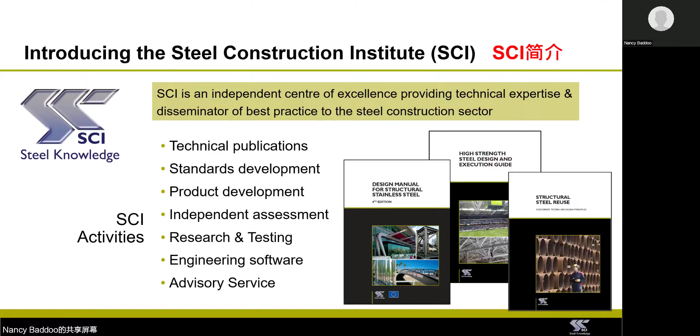At the Steel Construction Institute in the UK, we carry out a range of activities such as writing standards and technical publications. We have been closely involved in writing standards for Europe and the United States on structural stainless steel for many years.

This is our webinar series, 2 talks today and 2 next Tuesday. After each talk, there will be 5 minutes allowed for questions, and if you like, you can put your questions into the chat box.

My presentation today is divided into 5 parts as follows: firstly, an introduction, then I will show you examples around the world of load-bearing stainless steel, and then we get into details, properties, specification, and how to choose the right stainless steel for your project.

So let's start with explaining a few things about stainless steel. What is it? It is the name given to a family of corrosion and heat-resisting alloys of steel, in which you have the element chromium at least 10.5% by composition, and less than 1.2% of the element carbon.

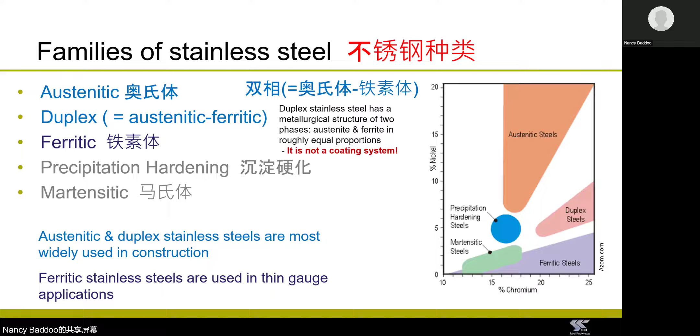The stainless steels used in construction are from the austenitic and duplex family. Within both families, there is a wide range of corrosion resistance, which depends on the alloying content. Most applications by a long way are austenitic stainless steels in construction. However, for weight-sensitive structures such as bridges and offshore platforms, duplex stainless steels will often be a better choice. The higher the alloy content, the more corrosion resistant the alloy, and the higher the cost.

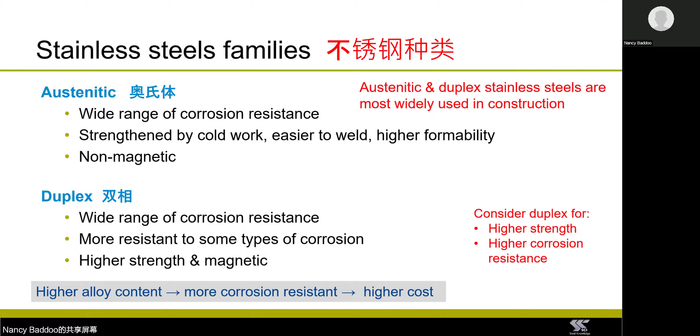Let's turn now to consider when you might use stainless steel in structures. Clearly it's more expensive than carbon steel, so there are only some particular applications where it makes good sense to use stainless steel. Stainless steel can be used in visible applications or in applications which are hidden from the eye. They may be large members or very small components. They can be architectural showstoppers or very basic utilitarian applications.

Firstly, and most commonly, you would use stainless steel if you had a structure needing excellent corrosion resistance and you wanted to avoid the need for a coating. So when might this be? For structures, say, in the food and drink industry or the chemicals industry, there may be a very strong reason why you don't want to risk a painted coating peeling off and contaminating the process taking place within the structure.

Stainless steel makes sense for those types of structures that have very long design lives. I'm talking about structures such as bridges and nuclear structures where the design life might be over 60 years and maintenance is just hugely expensive and something you want to avoid. Then, of course, the higher construction cost is outweighed by the lower maintenance cost.

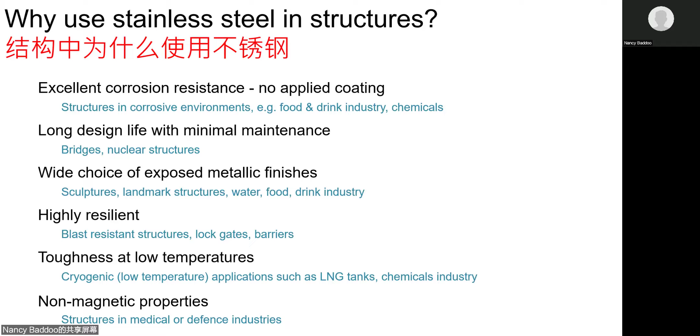Now, let's move on to the second part of the presentation, where I'm just going to take you round the world and show you a few examples of load-bearing applications. So let's start with some buildings and external structures.

So here I'm showing a viewing platform. Quite obvious, isn't it, why stainless was chosen for the viewing platform, because it's right by the sea.

And then if we move down, a local structure are the stainless steel tree-shaped columns in Nanjing. There are 42 of these beautiful structures, 42 stainless steel trees supporting the roof. Now, I think stainless steel was chosen not only because of the appearance, but also the corrosion resistance in a warm and moist environment.

And then the photo I show on the right is in Beijing, and this is a different type of structure altogether. It's a large glass cable net wall, 90 meters high, 60 meters wide, and it's using duplex stainless steel connections for the cable and tension rods, and the tension rods also are duplex stainless steel.

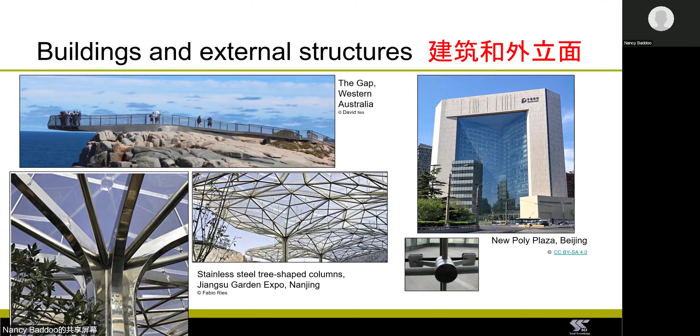Subway entrances has proved to be quite a popular application of structural stainless steel. There are at least 40 canopies now in the US, Washington, DC Metro. Why stainless steel? Well, it looks good, it's corrosion resistant, it's resilient.

These canopies in the Washington, DC Metro, it was a modular design because speed of installation was hugely important. So the modules were bolted together on site, made up of rectangular hollow sections.

And the subway entrance I'm showing on the right is using duplex stainless steel because very high strength was needed for this subway station that was flooded and a huge amount of damage caused during Hurricane Sandy.

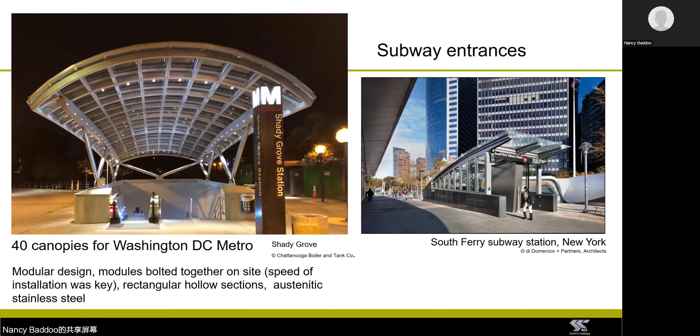Of course, sculpture is a popular application of stainless steel. I love the Cloud Gate structure in Chicago. And would you believe it's made up of 168 stainless steel plates welded together. It's highly polished, you can't see the seams, and it weighs about 100 tons.

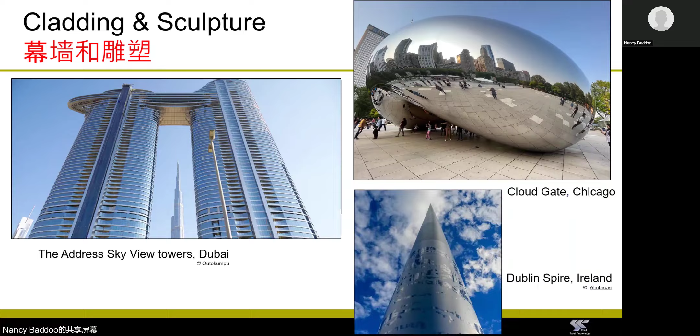Now, moving on from cladding and sculpture, this I feel is the most important area where structural stainless steel is used.

Often these are corrosive environments, and you do not want to have to go back and do maintenance and reapply coatings.

So the drivers for using stainless steel are clear: corrosion resistance, long life, minimal maintenance, no risk of contamination from paint peeling off.

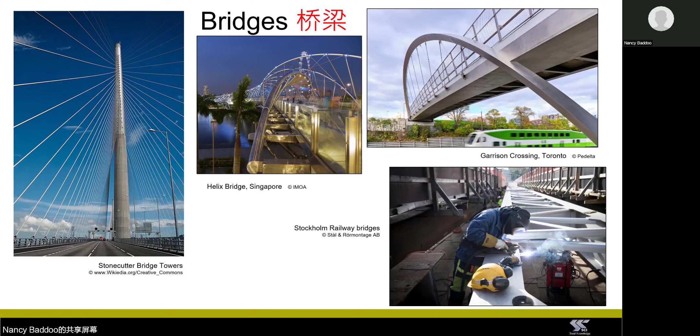We've also got a number of pedestrian bridges made of stainless steel. There are road bridges, and there are bridges carrying railways. So again, the reduction in maintenance, particularly over water or running over a railway, is very beneficial for using stainless steel. Right, let's move on now to the properties of the structural stainless steels we're talking about.

And it can be very useful in design. We'll talk more about that a little later today.

Of course, there can be disadvantages too. Stainless steel, because it strain hardens, can require more power when it comes to forming or cutting.

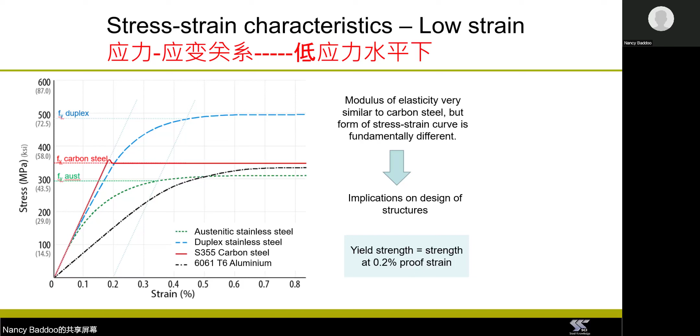Stainless steel has excellent energy absorption properties, much better than carbon steel or aluminium, due to its high rate of strain hardening and excellent ductility. Duplex stainless steel has similar ductility to carbon steel.

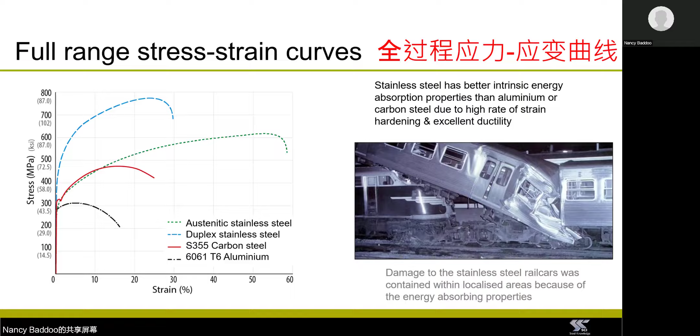So you get a sense for the effect of strain hardening when you look at the ratio of the tensile to yield strength. Note too that the modulus of elasticity that you need in your buckling calcs is very similar to carbon steel. This is the initial modulus of elasticity, and these properties are in the annealed condition.

Now this is a word you may not have come across. It basically means in the softened condition before any strain hardening has taken place.

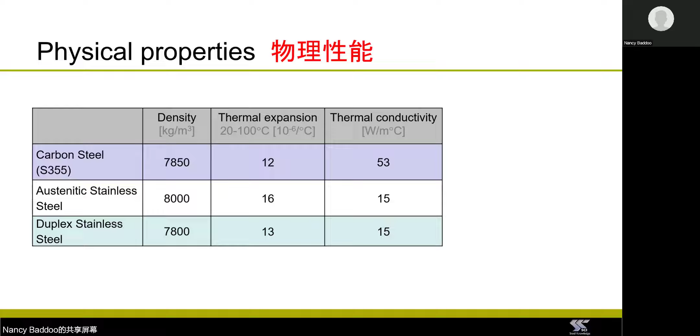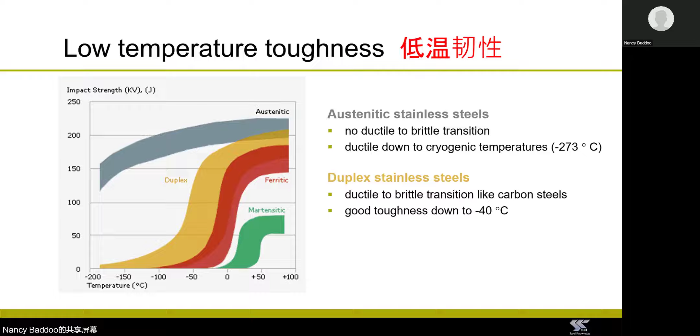So that completes what I was going to talk about properties. We're going to hear much more about designing structural stainless steel after the break. But I'm now going to explain how you specify stainless steel for a project.

When we talk about a stainless steel grade or type, we actually mean an alloy, i.e. a chemical composition, and not a strength. When we talk about carbon steel, we generally are referring to the strength of the carbon steel. But for stainless steel, it is the alloy and composition.

So for the families of stainless steels used in construction, most of the austenitic stainless steels have the same yield strength, around 200 megapascals. I say most because there have been some interesting developments in China, and some high nitrogen and low nickel austenitic stainless steel alloys have been recently developed with higher strengths. So I'm just saying that the most widely available austenitic stainless steels will have a yield strength of around 200 megapascals.

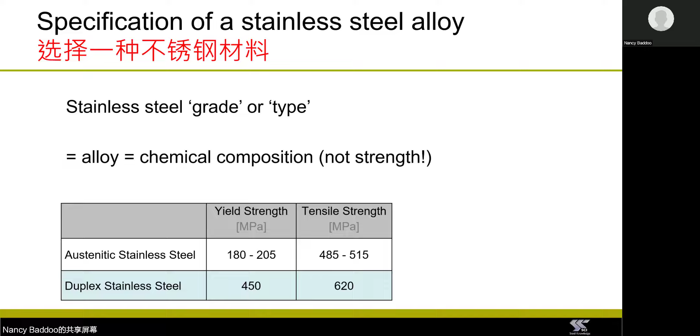I will briefly introduce the Chinese standards that are available for and relevant for load-bearing stainless steel members. Firstly, the standard that gives the alloys and the chemical composition and physical properties, that is GBT 20878. That standard contains lots and lots of stainless steel alloys which are appropriate for use in a wide range of industries.

Then GBT 4237 is the standard that covers the hot rolled stainless steel plate and strip. So these are the thicker product forms, with the thinner products covered in GBT 3280, which covers the cold rolled stainless steel plate and strip. So the cold rolled would be the thinner gauge.

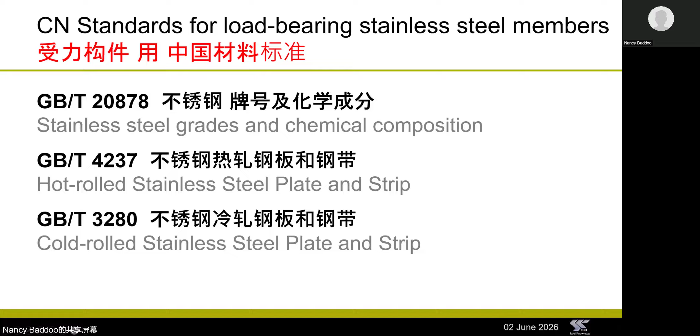This is the time when we're going to open up the Chinese stainless steel structural technical specification, CECS 410, and see what it says about stainless steel alloys. Now, the third talk in our webinar series is devoted to this standard, so I'm just going to say a very little about it.

So first, there are the standard or basic austenitic alloys, 2 of them. Then there are the austenitic alloys that contain molybdenum, so they have better corrosion resistance, and there are 2 of them.

And then there are the standard duplexes. There are 2 there. And there is 1 lean duplex. Now, what do I mean by lean duplex? I mean the alloying composition is less highly alloyed. So it has slightly less corrosion resistance compared to the standard duplex, but still very good corrosion resistance. It means it is a cheaper alloy, but it's not appropriate for use in the most corrosive environments.

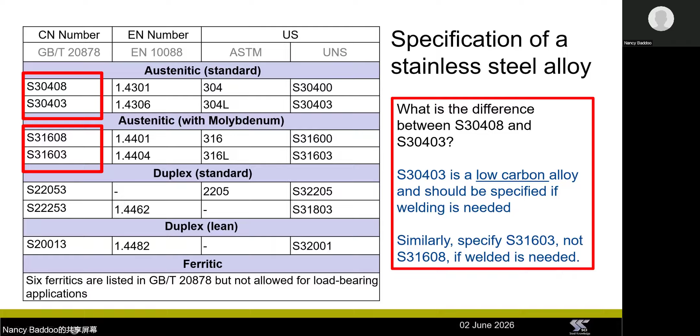Now let's look at the Chinese product standards for hollow stainless steel members. This is a hugely popular product form, widely used in load-bearing applications. I could find 3 Chinese standards. GBT 14975 covers the seamless stainless steel tubes, and then there are 2 for welded stainless steel tubes, GBT...

GBT 12770 is geared more towards mechanical structures, automotive parts, bicycles, furniture, general engineering, whereas JGT 539 is geared more towards construction, so probably that's the standard you would want to specify for architectural, handrails, structural components. This standard places a greater emphasis on the surface finish, corrosion resistance, and structural integrity.

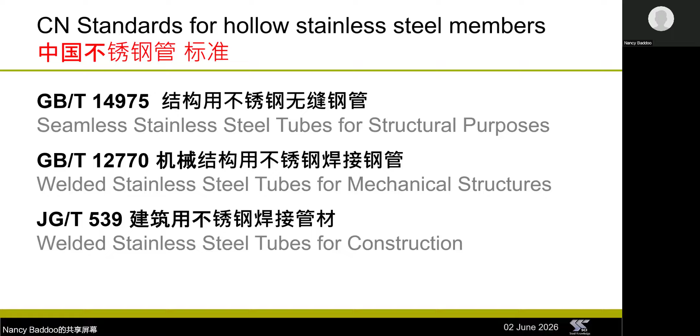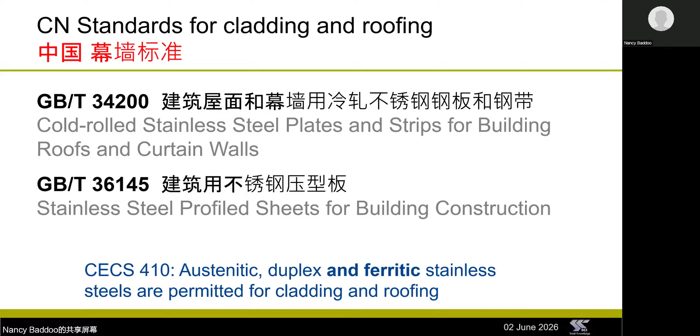Briefly then, what are the standards covering the lighter gauge stainless steels? Well, I've got 2 here I'm showing you. GBT 34200 covers the flat light gauge sheet coil stainless steel products, and then 36145 covers the corrugated and profiled sheets. I wrote at the bottom of the slide that the Chinese technical specification says that austenitic, duplex, and ferritic stainless steels are permitted for cladding and roofing. I've never come across duplex being used for cladding and roofing, but certainly ferritic and austenitic are widely used.

Let's move now to stainless steel fasteners. Here the family of standards are GBT 3098, and part 6 covers bolts, screws and studs, and part 15 covers nuts.

Before I explain how to use the standard, I would just like to emphasize that fastener assemblies should have equivalent corrosion resistance to the most corrosion resistant alloy being used. Very often you see that this guidance has not been followed and you see horrible corrosion. So it's important that you specify the bolt and the nut so that it is at least equivalent to the most corrosion resistant alloy being joined.

So a few slides introducing you to the Chinese standard for stainless steel fasteners. How you name a fastener is first by the letter A for austenitic, D for duplex, followed by a number 1, 2, 3, 4, 5, or 8, and that tells you the corrosion resistance. 1 is the least durable and 4 and 5 are the most durable. You really shouldn't use steel grade A1 - that doesn't have very good corrosion resistance. So the most common bolting alloys you'd be using are grade A2, which is like a 304, and grade A4, which is like a 316 in terms of corrosion resistance.

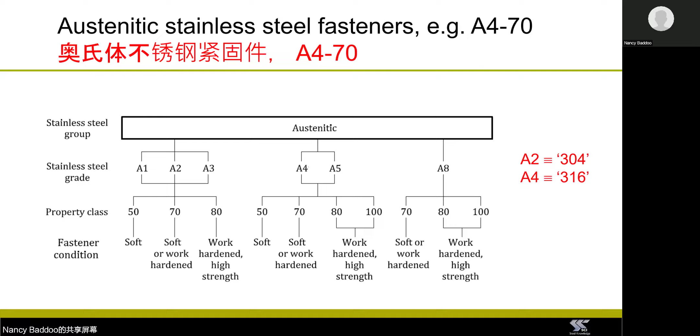And then the final 2 numbers tell you the strength. It's called property class, but you can see here there are property classes 50, 70, 80, and 100. I will tell you a bit more about the strengths in another slide, but I wanted to first of all show you the duplex naming system.

So here we have, starts with a D, and then the 2, 4, 6, or 8 tells you how corrosion resistant it is. So a D6 is your standard duplex. D2 and D4 is the lean duplex. And then we have the strength. Duplex stainless steel fasteners are not as widely available as austenitic fasteners, but if you're joining duplex stainless steel, it really is recommended that you use duplex fasteners.

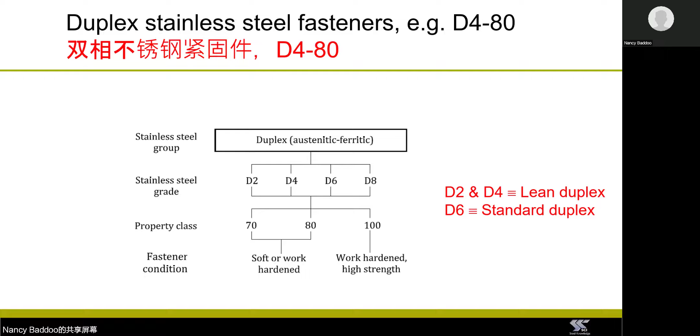So finally, on fasteners, here is a table showing you the tensile strength. Let's look at, for example, A470 - that's a really common stainless steel fastener. You can see that its tensile strength is 700 megapascals. If, however, you needed a higher strength, then you would consider specifying A480, which has a tensile strength of 800.

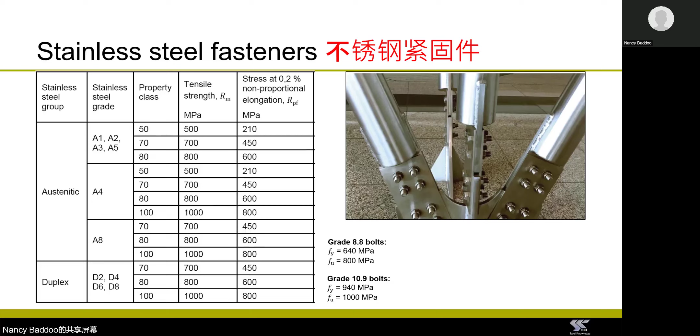What about surface finish? Many surface finishes are available with stainless steel. Firstly, let's talk about mill finishes. These are the finish straight from the production mill, the most common, and the standard finish for heavier sections. It's dull, non-reflective - you might think, is this really stainless steel? But it is. Stainless steel doesn't have to be shiny.

In the European standard EN 10088, the number 1 is used to determine a hot rolled finish, and number 2 for a cold rolled finish. For architectural applications, cold rolled surfaces would generally be chosen - they're smoother and to tighter dimensional tolerances.

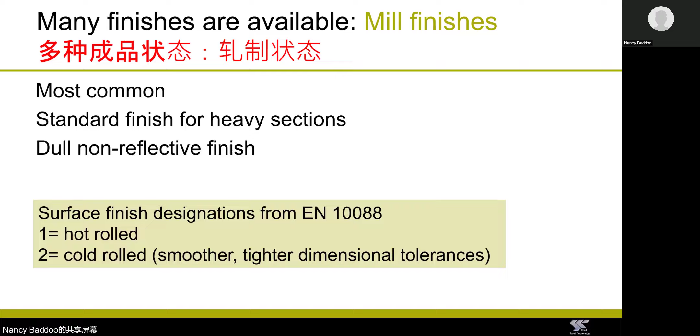But of course, we don't stop at mill finishes. There are many special finishes also available for stainless steel, generally applied at polishing houses further down the supply chain. These may be ground, brushed, polished, even patterned and coloured.

The smoother the finish, the better the corrosion resistance and the better the cleanability. Why? A rough finish is more likely to retain contaminants than a smooth finish, and rain washing is less effective on a rough finish than a smooth one. A rough finish also has more micro crevices than a smooth one. But of course, a smoother finish is a more expensive finish, so you really have to weigh up the advantage of a smooth finish against the additional cost.

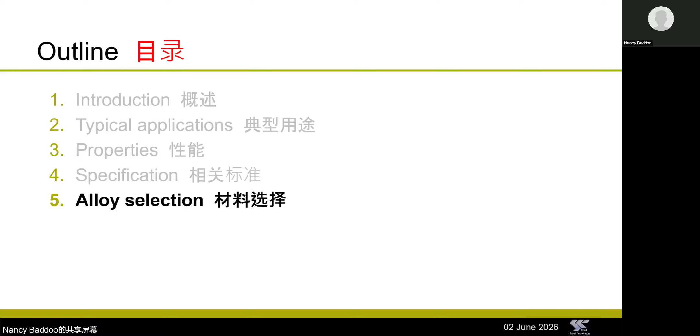Now, the final part of my talk is to lead you through the process of alloy selection. How do I choose the right stainless steel alloy for my project?

The most important part of your choice is the service environment. By that I mean, where is the structure that you're designing? It's important that you characterize the environment carefully. Most of my talk is assuming that the structure is in an atmospheric environment.

So the issues you're concerned with are chloride salts. Is the structure close to the coast, or do you use de-icing salts in cold weather? What type of de-icing salts do you use? Is the structure in a polluted industrial environment? Is there a lot of pollutant in the air due to traffic? Is the structure going to be washed by rain or sheltered?

Washing by rain is good. Stainless steel loves water, so washing by rain is good. Sheltering is not so good, because then you can have an accumulation of chloride salts or other contaminants.

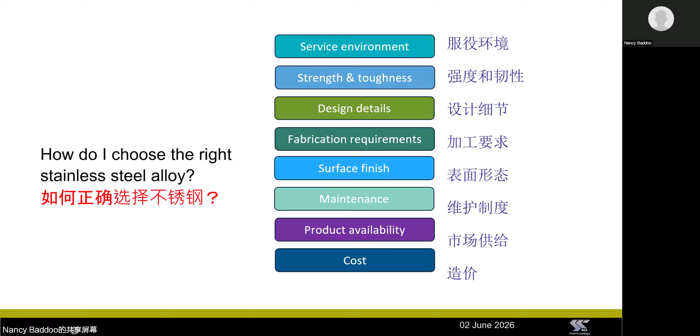What do you need? Rod, fasteners, hollow sections, plate, cold form channels, angles - they're likely to be available in austenitic stainless steels.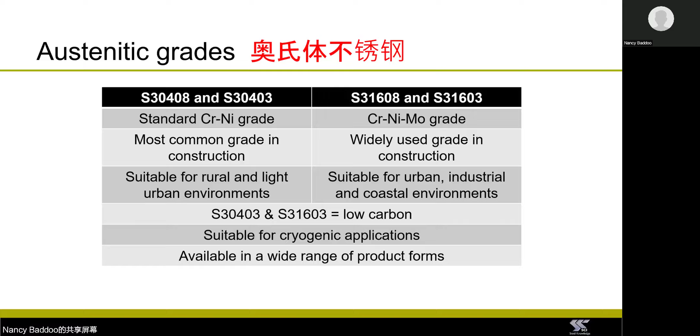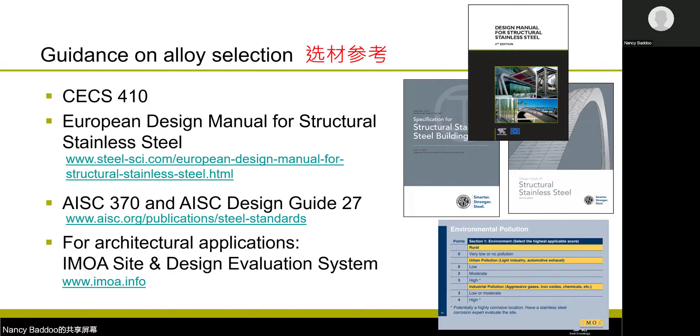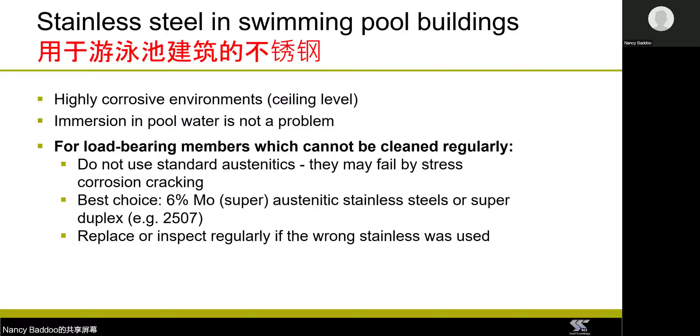The general advice is that if you have a load-bearing member in an environment like this that cannot be cleaned very regularly, then you should not use the standard austenitics. You need to use a more highly alloyed stainless steel, perhaps a 6% molybdenum super austenitic or a super duplex, and very regular inspection should be carried out if the wrong stainless steel has been used.

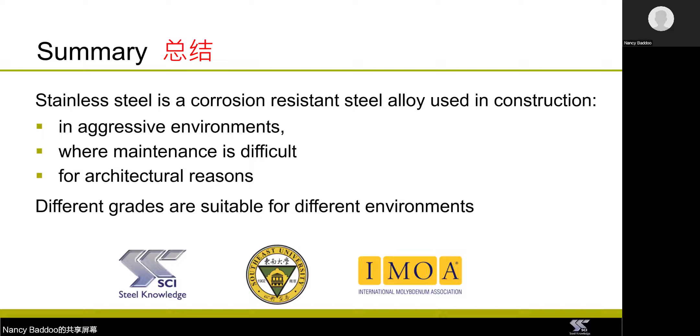This completes what I'm going to talk about this morning. I've summarized different grades for different environments. If anything I've said has been interesting and helpful to you and you would like to go back and check it out, a recording of all the talks and the slides as PDF will be hosted on this WeChat channel and the IMOA Chinese website after the webinars.

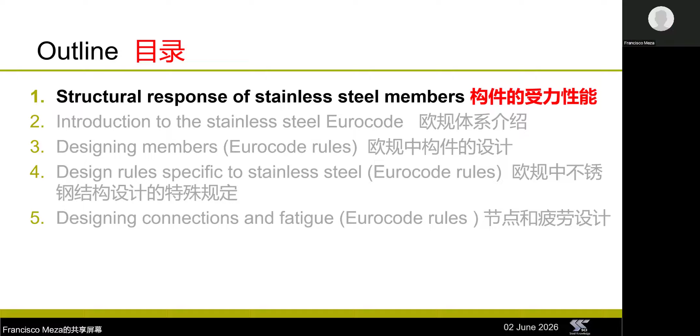Now, by nonlinearity, what I mean is that the stress strain behavior deviates from the linear behavior that is characteristic for carbon steel. So that is before the yield strength is reached.

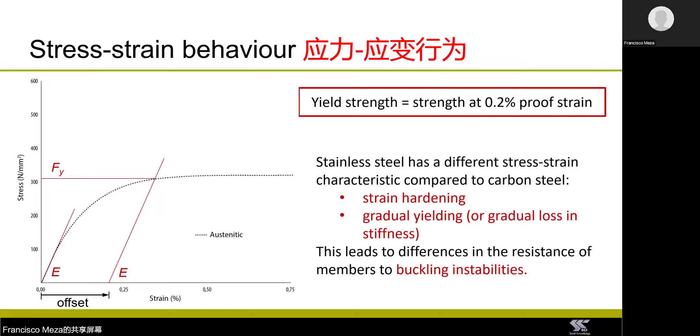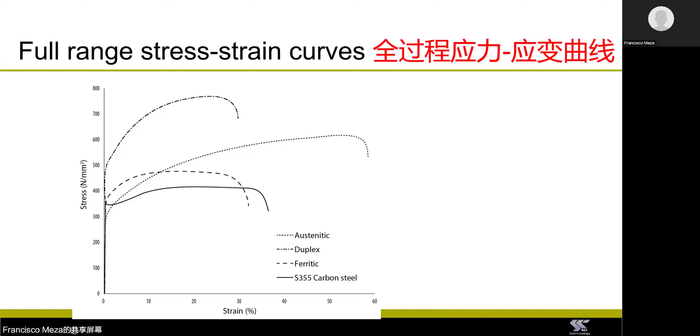So how does the nonlinearity of stainless steel affect its buckling performance? If you look at any of the elastic buckling resistance formulas, you will see they all have one thing in common, which is that they are all proportional to the elastic modulus of the material. This is the case for local buckling, column buckling modes such as flexural buckling, or lateral torsional buckling in the case of beams. Now, the initial modulus of stainless steel is similar to that of carbon steel, but as you can see in this figure, it decreases gradually as you approach the yield stress.

Because of the reduction in the elastic modulus when the stress increases, the elastic buckling resistance also reduces, which leads to a reduction in the resistance of the member. Now, you have to bear in mind that for carbon steel members, this reduction in the elastic buckling resistance does not occur until the yield strength is reached. Therefore, you could expect that the buckling performance of stainless steel is going to be slightly worse than that of carbon steel.

Now, in most stainless steel design codes, the buckling resistance is calculated using the initial elastic modulus, and the reduction in the elastic modulus is accounted for by using different buckling coefficients in the resistance equations from those used for carbon steel.

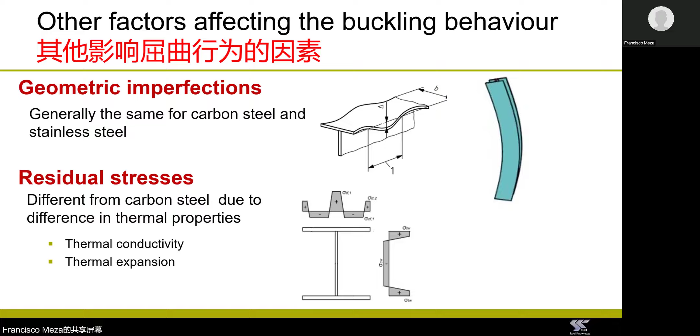Now, the residual stresses of stainless steel and carbon steel sections are generally different because of the different thermal properties of carbon steel and stainless steel, as Nancy showed you previously. The main thermal properties affecting the residual stresses are the thermal conductivity and the thermal expansion. The thermal conductivity of stainless steel tends to be lower than for carbon steel, and the thermal expansion tends to be larger. And for austenitic stainless steel, the thermal conductivity is the lowest, and the thermal expansion is the largest. They also show the most pronounced loss of stiffness, and because of that, they tend to exhibit the lowest buckling performance of all the stainless steel alloy families.

Now, not all buckling modes are affected to the same degree by the nonlinearity of the stress strain characteristic or the geometric imperfections and residual stresses. For example, global buckling is known to be more affected by these factors than local buckling.

Here I'm showing you what happened to a stainless steel column depending on how slender it is. So for columns with low slenderness, that means relatively short columns, the resistance of the column is governed by yielding, and therefore the beneficial effect of strain hardening will result in a stainless steel column reaching a larger resistance than a carbon steel column. Now, in a long column or a column with a high slenderness, the resistance is governed by global buckling.

In this case, the compressive stresses in the column will be below the limit of proportionality of stainless steel, and therefore the behavior will be predominantly elastic, and in this case, the stainless steel column will behave in a very similar way as a carbon steel column. So we're referring to this range of the stress strain curve.

Now, for columns of intermediate slenderness, the resistance is also governed by global buckling, but in this case, the compressive stresses in the column will be between the limit of proportionality and the yield strength. As you can see in this figure, this is the region where the detrimental effect of the nonlinearity is more pronounced. And therefore, in this range of slenderness, a stainless steel column can be expected to be less strong than a carbon steel column.

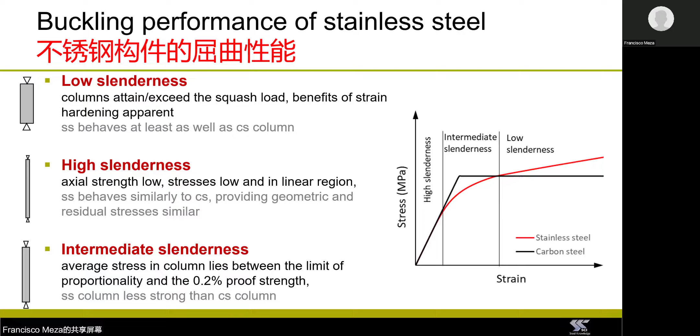Okay, so that was a brief introduction about how the stress strain characteristic of stainless steel affects its buckling performance. Now I'm going to give you a brief introduction about the Eurocodes.

So when designing stainless steel structures in accordance with the Eurocodes, there are three main parts that need to be used. We have Eurocode 0 that lays out the basic principles of design in the Eurocodes and tells you how to choose the load combination depending on the type of design you're doing. Then we have Eurocode 1, which gives the rules for calculating the design actions on the structure, and Eurocode 3, which gives the rules for calculating the resistance of the structure.

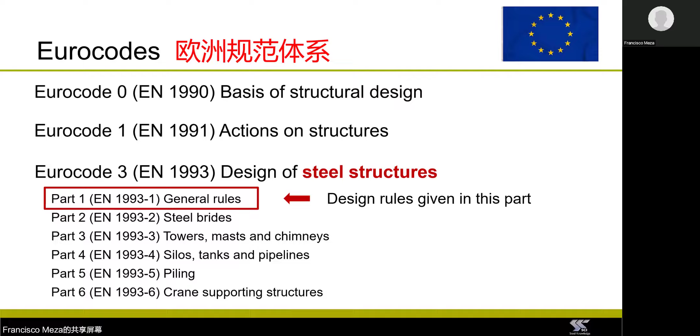So Eurocode 3 contains 6 main parts, and part 1 contains the general rules for the design of steel structures. This is the part that you will need to use for most cases. Then you have parts 2 to 6, which provide rules that are only applicable to specific types of structures.

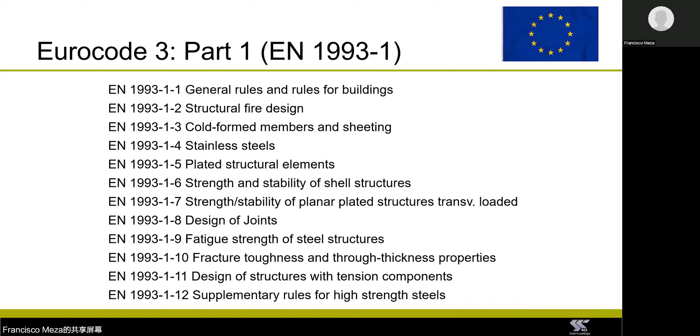Now, if you look into Eurocode 3 part 1, you will see that there are, at the moment, 12 different parts, although there are new parts that will be added in the future. So the rules for stainless steel structures are given in part 1.4, and this is a supplementary part that modifies the rules that are given in other parts of Eurocode 3 part 1, which are the ones you can see here.

So Eurocode 3 part 1.4 covers the design of structures made of the three main alloy families: that is ferritic, austenitic, and duplex stainless steel. And the type of section can be hot rolled, welded sections, cold formed sections, and also bar sections. As I mentioned previously, Eurocode 3 part 1.4 is a supplementary standard, which means that it only gives rules when the rules for carbon steel that are given in other Eurocode parts need to be modified in order to make them applicable to stainless steel.

The standard covers the design of members and connections at ambient temperature and also under static loading. And for other design scenarios, such as fire design, design against fatigue, or other types of structures such as shell structures, the rules are given in other Eurocode parts together with the rules for carbon steel.

Eurocode 3 Part 1.4 was first published in 2006, and since then it has been amended twice. The first amendment was in 2015, and the second one was in 2020.

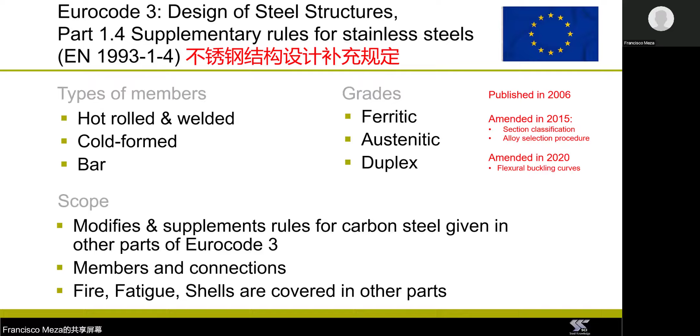Now, the modifications made during these amendments have been very localized, but currently all the Eurocodes are experiencing a major revision with the development of the second generation of the Eurocodes. So the intention of these revisions is to improve the ease of use, increase harmonization

between the Eurocode parts, and to improve the design rules. And for Eurocode 3 Part 1.4, the second generation will provide more accurate and comprehensive rules for the design of stainless steel structures.

So many of the parts for the second generation of Eurocodes have already been published to help engineers prepare and get familiar with the new Eurocodes. But until March 2028, you should still be using the first generation of the Eurocodes.

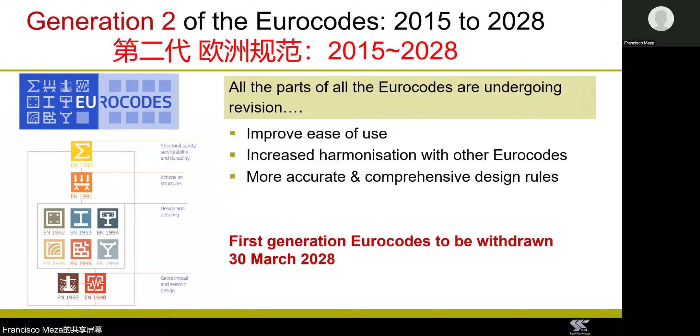Okay, so now I will talk about the design of stainless steel members in accordance with Eurocode 3 Part 1.4.

So the design rules given in Eurocode 3 Part 1.4 follow the same approach as the one for carbon steel. For tension members and restrained beams, the rules are identical to those for carbon steel. In these cases, the resistance is not controlled by buckling, and therefore using the same rules given for carbon steel is conservative. Now, for the case in which the resistance is controlled by buckling, Eurocode 3 Part 1.4

applies some modifications to the carbon steel resistance equations, but tries to keep the same format of the equations that are used for carbon steel. So the idea is that anyone familiar with the design of carbon steel members will have no issue designing stainless steel members.

Eurocode 3 Part 1.4 also includes rules on alloy selection, which Nancy briefly mentioned, and these rules are specific to stainless steel. It also provides modifications for the calculation of deflection to account for the gradual loss of stiffness of stainless steel. And Eurocode 3 Part 1.4 also includes specific rules for stainless steel that permit taking advantage of the benefit of strain hardening. I will describe these rules later on in this presentation.

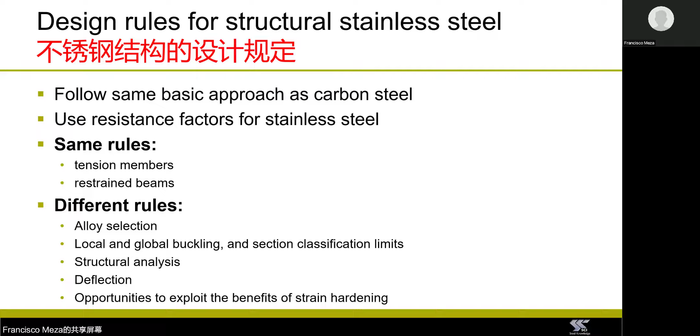Okay, so let's talk about the design for local buckling and the section classification limits. So the purpose of this classification is to assess the susceptibility of the cross-section to local buckling. Now, the risk of local buckling only exists when the member is subject to compressive stresses, which is why if the cross-section is subject to tension, you don't need to check its cross-section classification.

of the cross-section. And when you check the class of the cross-sectional element, you are basically comparing its width to thickness ratio against limiting values. And these limiting values depend on the yield strength of the steel, the stress distribution across the element, and whether the element is an internal or an outstand element.

So an internal element would be the web of an I section, for example, which is supported on both sides by the flanges. And an outstand element would be the flanges, which are only supported on one side by the web.

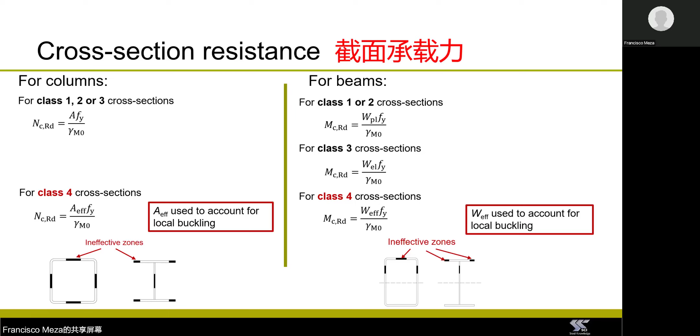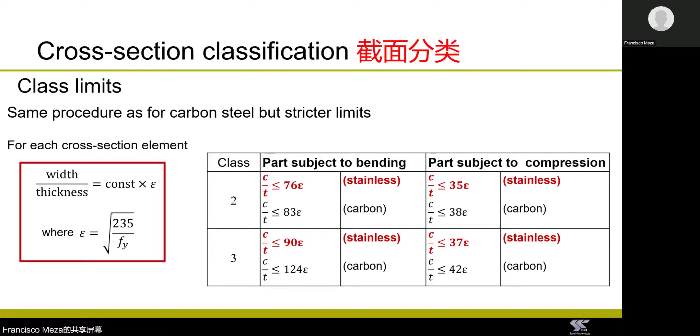So here I'm showing you some of the classification limits that are given in the Eurocodes for carbon steel and for stainless steel. Cross sections that are not able to satisfy the class 3 limits are classified as class 4, which means they are susceptible to local buckling. Now, if you compare the class limits for carbon steel and stainless steel, you can see that the limits for stainless steel are more strict than those for carbon steel, and this is because of the more pronounced non-linearity of stainless steel.

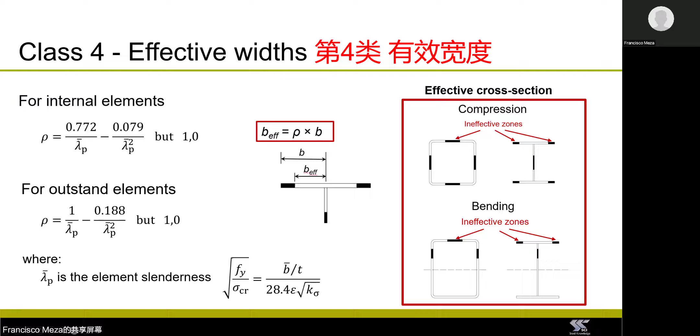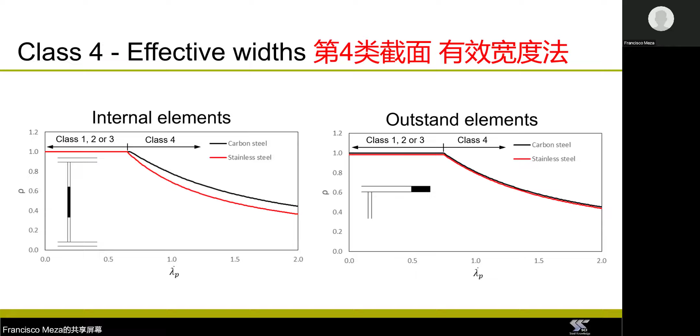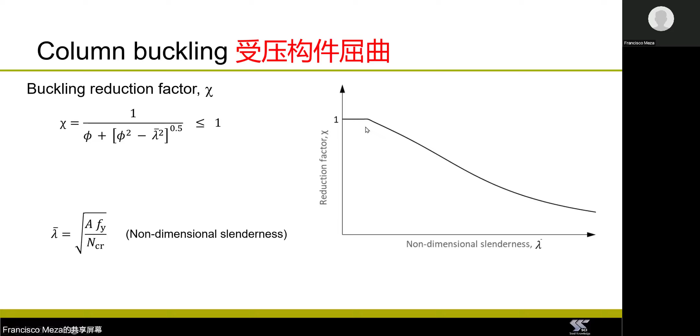The reduction in resistance due to global buckling is taken into account by the reduction factor chi. In this slide, you can see the equations that are used to calculate this reduction factor. As you can see, the reduction factor chi depends on the non-dimensional slenderness of the column, given by the symbol lambda bar zero, lambda bar. The curve that expresses the reduction factor chi as a function of the non-dimensional slenderness of the column is known as the buckling curve, which is this curve you see here.

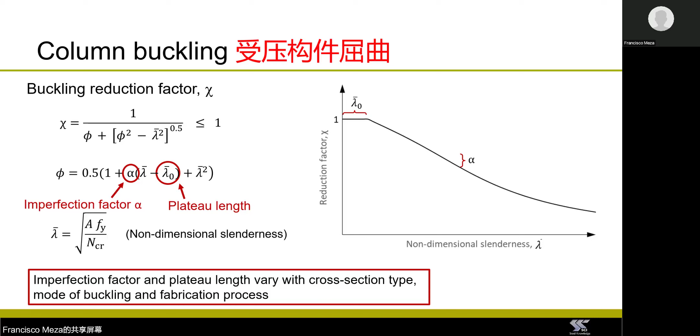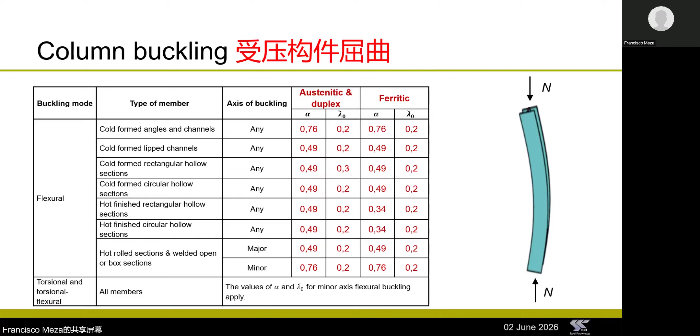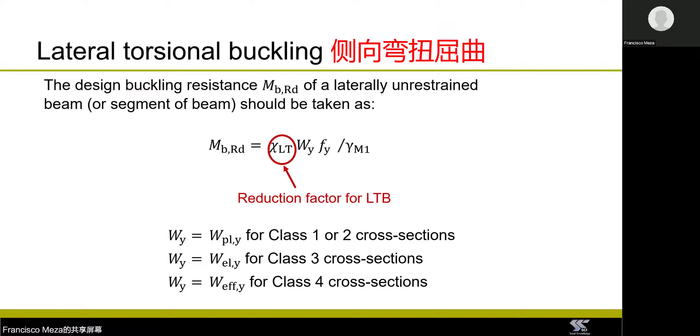Okay, let's talk about lateral torsional buckling of beams now. The design of beams against lateral torsional buckling is very similar to the design of columns, which I have just shown you. Here we have the equation used to calculate the resistance of stainless steel beams against lateral torsional buckling, and this equation is the same equation used for carbon steel beams. In a similar way as for columns, the reduction in the cross-sectional resistance due to lateral torsional buckling is accounted for through the reduction factor chi sub LT.

Here you have the equations used to calculate the reduction factor chi sub LT. The only difference between these equations and the ones used for carbon steel beams is the values used for the imperfection factor and the plateau length factor. For stainless steel beams, the plateau length is taken as 0.4 for all types of cross sections, and the imperfection factor is taken as 0.34 for cold formed sections and hollow sections, and 0.76 for welded open sections and any other type of section.

You might have noticed that the equations for calculating the reduction factor chi sub LT are the same as the ones used for columns. But in this case, you have to use the non-dimensional slenderness of the beam, calculated based on the elastic lateral torsional buckling moment. In the second generation of Eurocode 3 part 1.4, there will be some minor changes to this lateral torsional buckling curve, and there will also be a new equation for determining the reduction factor for lateral torsional buckling.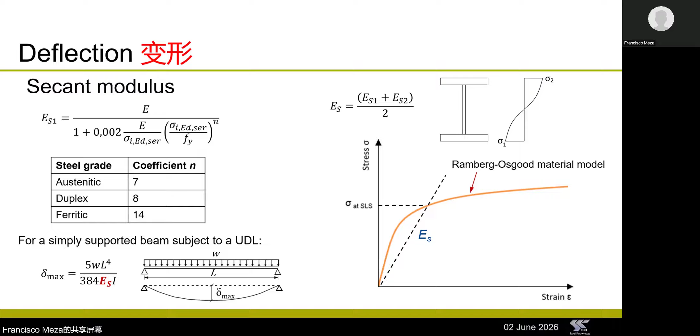Now I'm going to tell you about design rules that are going to be included in the second generation of Eurocode 3.1.4, which have been derived specifically for stainless steel, and are intended primarily to take advantage of the beneficial effect of strain hardening. I'll cover the calculation of an average yield strength, used to account for the increase in strength that cold formed stainless steel sections experience during fabrication, and also an alternative design method for calculating the resistance of stainless steel sections, called the continuous strength method.

I'm going to start with the rules for calculating an increased yield strength that results during the fabrication of a cold formed stainless steel section. This increase in strength is because of the significant strain hardening of stainless steel. So when you plastically bend a sheet or plate made of stainless steel, the material will show an increase in its yield strength due to the cold work that you apply.

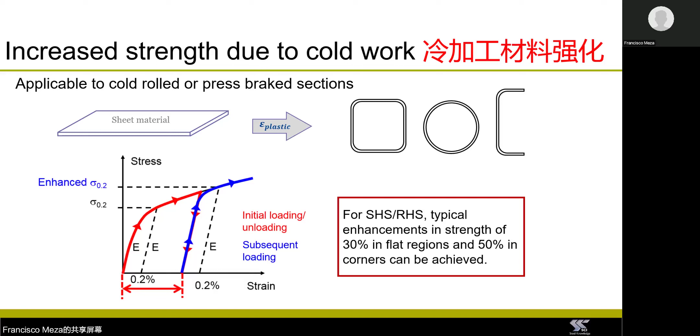In this slide, I'm showing you how this increase in yield strength is distributed over a square hollow section and a circular hollow section.

For the square hollow section, the darker red around the corners represents a larger increase in yield strength, which results from the significant plastic deformation applied to form the corners. For square and rectangular hollow sections, the flat portions might also show an increase in yield strength depending on the fabrication process, but this increase will be less significant than in the corner regions.

In a cold-formed round hollow section, you will also get an increase in yield strength, but this increase is uniformly distributed across the entire cross-section because the plastic deformations in circular hollow sections are more uniform.

So Eurocode 3.14 allows you to calculate an average yield strength for the entire cross-section based on the yield strength developed in the corner regions and also in the flat regions.

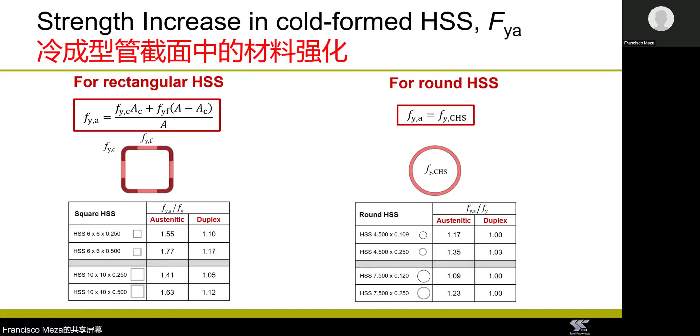One important thing to take into account is that you cannot use the average yield strength when designing a cross-section that contains a weld or is adjacent to a weld. This is because of the annealing effect of the weld, which can completely remove the increase in strength due to cold work. So if the cross-section is near a weld, you will have to use the nominal yield strength when designing the cross-section.

The type of welds I am referring to are welds carried out after the fabrication of the section. This would include, for example, the weld used when attaching an end plate to the column, but it doesn't include the seam weld used during fabrication of the section, because the presence of this seam weld is already taken into account by the equations used to calculate the average yield strength.

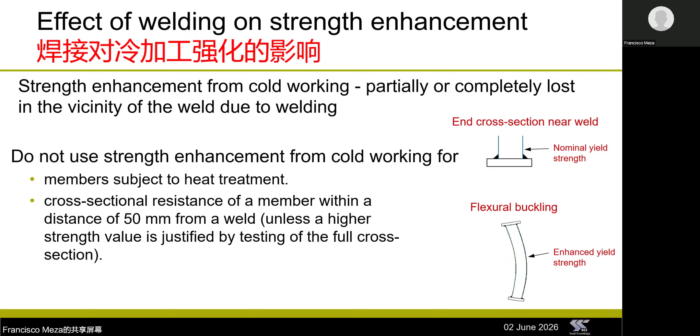Eurocode 3.14 will also include the continuous strength method, which is a design method for calculating the resistance of stainless steel sections that takes into account the beneficial effect of strain hardening.

One characteristic of the continuous strength method is that it does not require classification of the cross-section into class 1, 2, 3, or 4, and treats all cross-sections in the same way.

One thing that is very important to take into account is that in order to use the continuous strength method, the section cannot be susceptible to global buckling. So you will need to make sure that you provide sufficient restraint to your columns or beams to prevent flexural buckling or lateral torsional buckling from happening.

So the way the continuous strength method works is: first, you have to calculate the slenderness of the cross-section, which is given by the square root of the ratio between the yield strength and the elastic critical local buckling stress of the cross-section. Then you can use what we call the CSM base curves, which give you the maximum compressive strain the cross-section can sustain before failing due to local buckling.

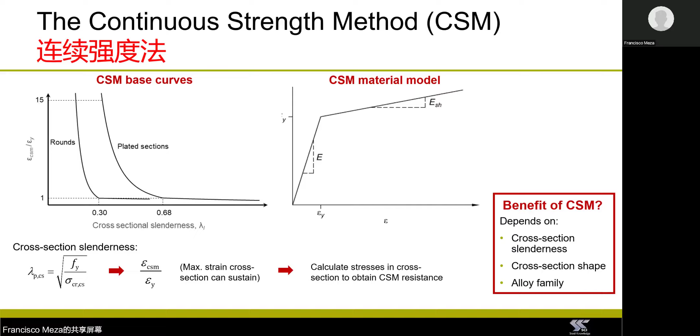Okay, so now we're going to move to the last part of this webinar, where I'm going to briefly mention the main points that you need to bear in mind when dealing with stainless steel bolted and welded connections. And then I will say a few words about fatigue.

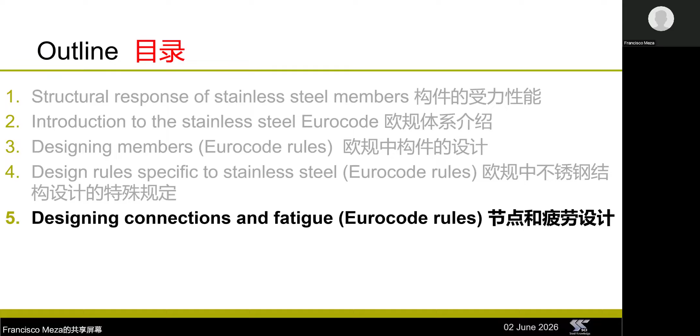One of the main things that need to be taken into account when designing stainless steel bolted connections is that the bolt, the nut, and the washer should have better corrosion resistance than the connected plates. This means you should use stainless steel bolts when connecting stainless steel members, and you should not use galvanized bolts, even in temporary structures, because of the risk of bimetallic corrosion.

Many of the design rules used for carbon steel bolted connections are also applicable to stainless steel bolted connections. For example, the minimum and maximum spacing requirements for stainless steel bolts are the same as those for carbon steel bolts, so there's no difference there. And the equations given in Eurocode 3 part 1.4 for calculating the tensile and shear resistance of stainless steel bolts are also very similar to the equations used for carbon steel bolts. If anything, they predict higher resistances.

One thing you should be aware of when dealing with stainless steel bolted connections is that they are more susceptible to galling than carbon steel bolted connections. Galling might occur during the tightening of the bolt due to the relative movement between the threads of the bolt and the nut and the high contact pressures that originate. This could result in the breakdown of the protective oxide layer of stainless steel. If this occurs, it could lead to the threads of the bolt and the nut bonding together, increasing friction, and in extreme cases, it could lead to the threads fusing together, making it impossible to continue tightening the bolt or even removing it.

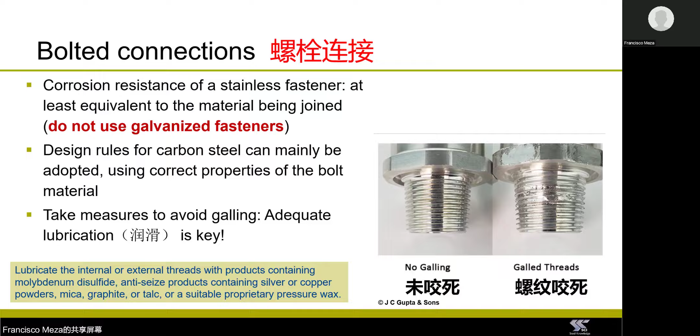With regard to the bearing resistance of stainless steel bolted connections, there are some differences with respect to the equations used for carbon steel. This is because the equations used for stainless steel take into account the more nonlinear stress-strain characteristic of stainless steel, and also the more significant amount of strain hardening. So the rules for calculating the bearing resistance of stainless steel bolted connections distinguish between plates with thicknesses of up to 4 millimeters and plates with thicknesses greater than 4 millimeters, and this distinction is made to align with the rules given for carbon steel bolted connections.

The bearing resistance equations for stainless steel also take into consideration whether the deformation at the bolt hole needs to be limited or not. For the case in which deformation is a design consideration, the equations that Eurocode 3 1.4 gives were derived by targeting a 1 millimeter deformation at the bolt hole under service loads. But if deformation is not a design consideration, Eurocode 3 1.4 allows the use of different bearing resistance equations that will predict greater resistances.

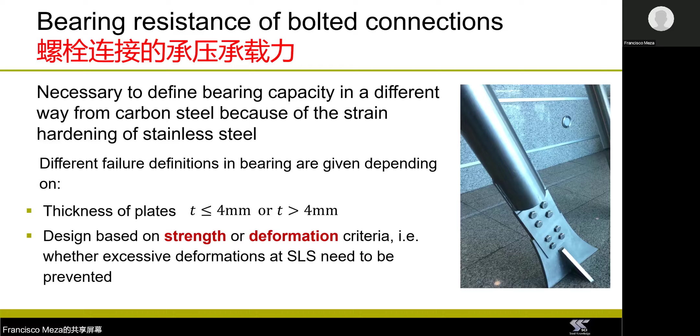Now, if you need to design a bolted connection that is used to connect stainless steel to carbon steel, the stainless steel part of the connection has to be isolated from the carbon steel part to prevent bimetallic corrosion.

Bimetallic corrosion might occur when you have two dissimilar metals in contact with each other, and they are bridged by an electrolyte solution. When this is the case, the less noble metal, which in our case would be the carbon steel plate, will corrode at a faster rate than if it was not in contact with the stainless steel plate. So the main strategy to prevent bimetallic corrosion is to separate the two dissimilar metals.

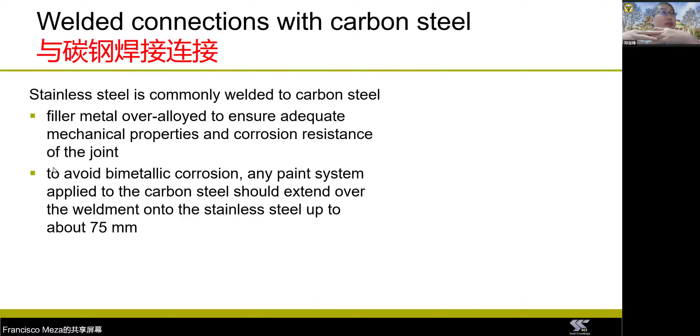Okay, okay, thank you. So any questions from the audience? So let me have a look.